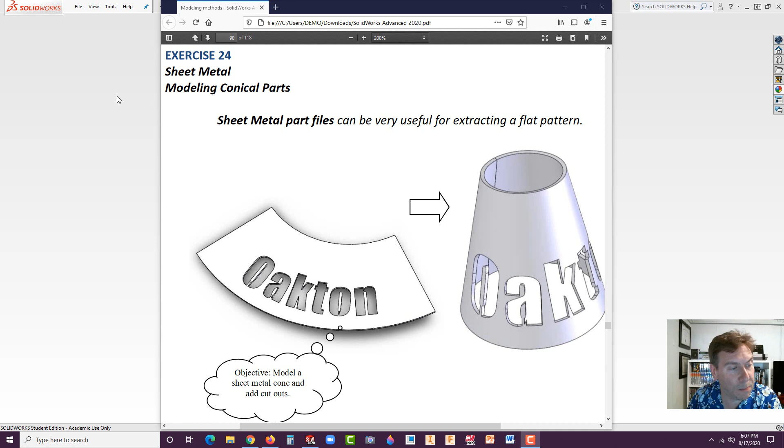We're going to take a rectangle and have it go to a smaller circle or a radius. But you would just replace the rectangle with another circle or a radius in order to create this. But let's go ahead and take a look at this, because not many people that I've come across actually remember this method, because it was done in the 90s and it's still inside SolidWorks.

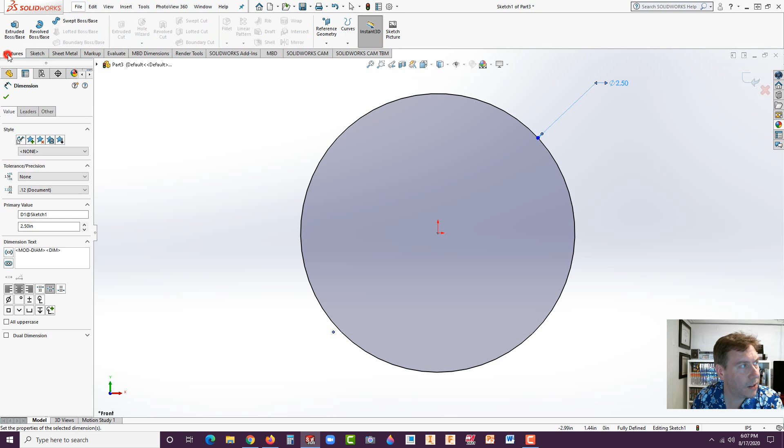Okay, so go to File, New, Part, and hit OK. Select the front plane and start a sketch. Take the circle tool and draw out a circle. And let's go ahead and dimension it at 2.5 inches diameter. Let's go to Features and Extrude Boss. And what we're looking to do is extrude it 2.5 inches at 13 degrees of draft. So put in 2.5 and then turn on draft and 13 degrees.

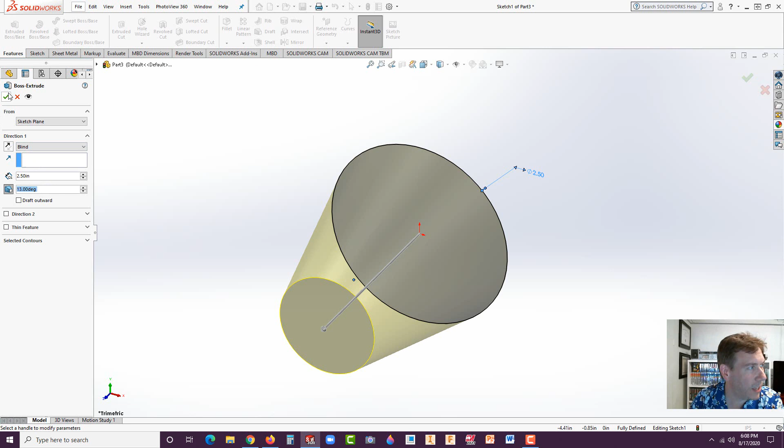Now, another application where if you have an angle and you want to make something like this shape really quick, that's why you might use this. Again, you might not really want to use it too often these days because there's much better ways with the loft. But let's take a look here. Okay, so I hit OK. Now go to the shell command and set your wall thickness. We'll go with 0.06. Select the front and back faces to remove for the shell and hit the green check.

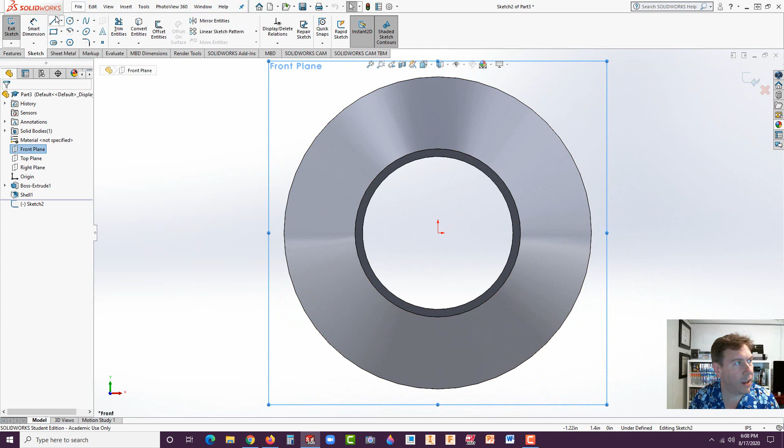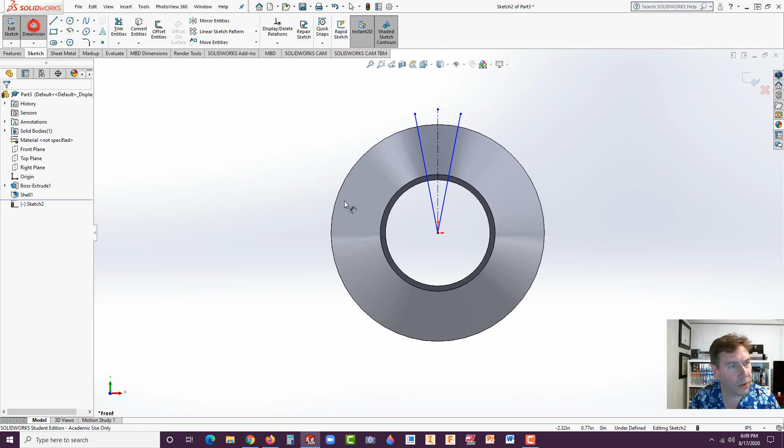All right, now we could go ahead and select the front plane, start a sketch, and let's go normal to the front there. Okay, and then I'm going to draw a center line from the origin straight up, and then hit escape, go to the line tool, and draw a line in like that. Now, with those two selected, go ahead and mirror those across. And let's go to the dimension and add a distance here at the top of 0.01. And let's control select that edge to this edge and make it coincident.

All right, notice I didn't close it. And also notice I didn't use a rectangular cut. That's one of the tricks. If you actually just had a straight rectangle, last I tested it, it fails to actually unfold it. So just be aware, that's why you have to put the angles in.

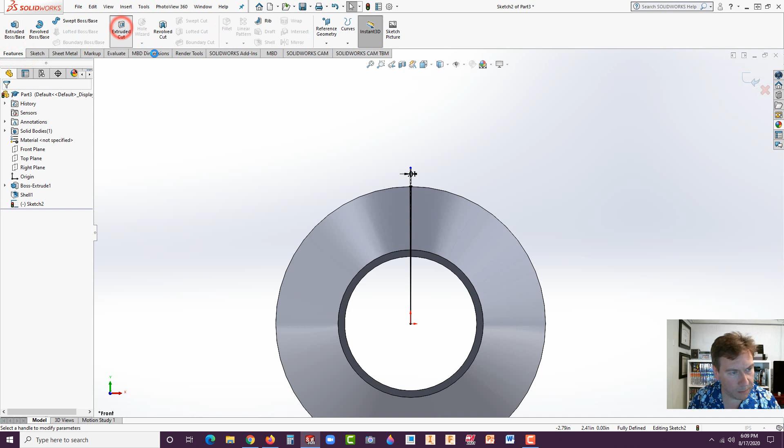Okay, so we go to Features, Extrude Cut, and it's usually pretty good. In this case, it's actually showing this little arrow. If I zoom up, it's going to cut everything on the outside and leave a little sliver. We want to flip the side to cut, so check the flip side to cut, and make sure it's set to through all. Hit the green check, and it should slice right through it and give you something like that.

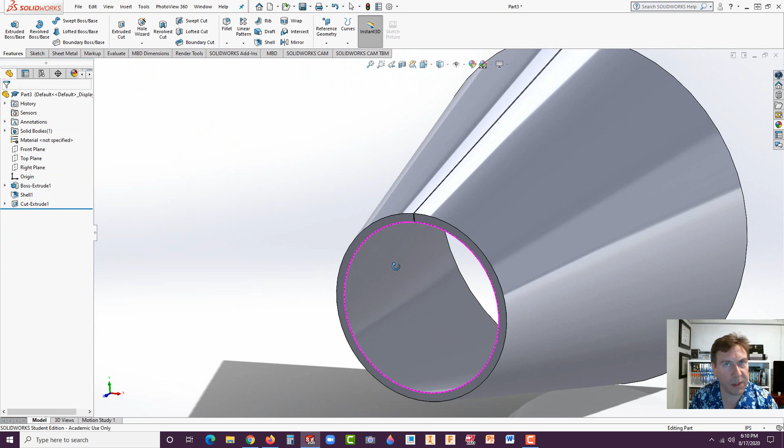Okay, now I'm going to go to the sheet metal tools. Notice I didn't use any sheet metal tools up until this point. We're going to use the old insert bends. And just a little history, the insert bends came out in 1997. That's when I started with SolidWorks with a value-added reseller, and I was a trainer. And this is all we had back in those days to make a cone that would work. And actually, I don't even remember knowing this technique until maybe around 98. So maybe a year later.

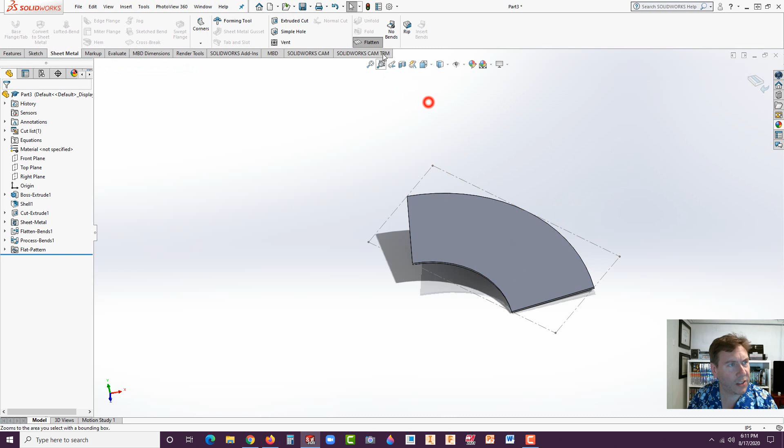But anyhow, for the fixed face, select one of these edges here, and hit the green check mark. And now you should be able to flatten it. Okay. Now, I know I have some lettering on the outside. As of lately, for some reason, the geometry hasn't liked the lettering too much, but let's try it. Let's actually fold it back up and use the unfold tool. And select one of those edges, collect all bends, hit the green check.

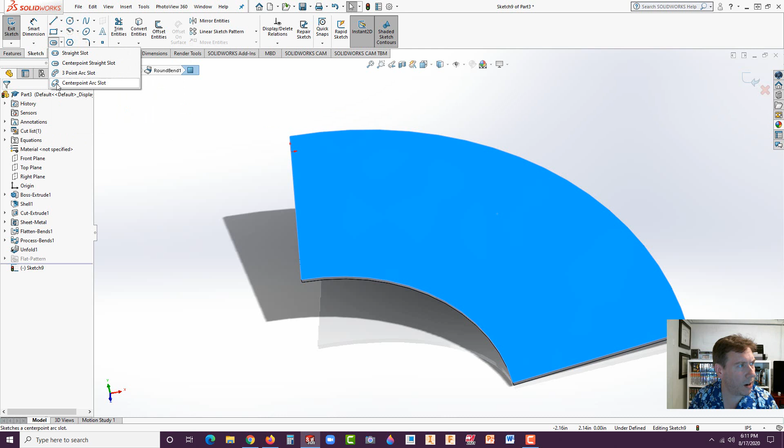Now we could select that face, start our sketch. Lettering doesn't seem to work too well, so let's try one of these center point arc slots. And let's go to features, extrude cut, link to thickness. And now let's go back to sheet metal tools, fold, collect all bends, hit the green check. And as I feared, it failed.

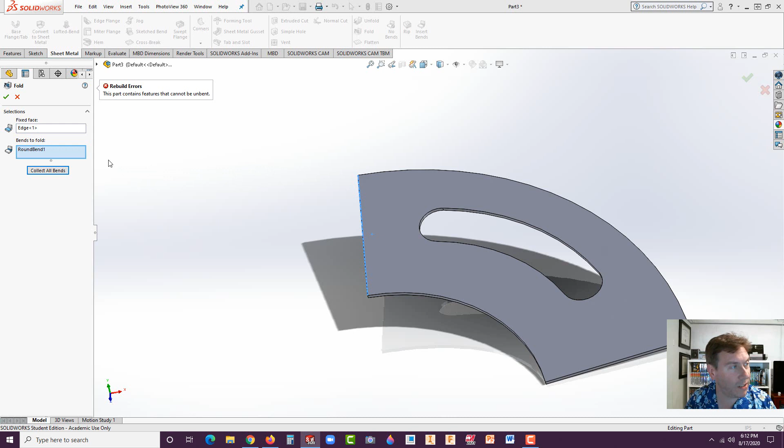So sometimes in the past it used to work, and for some weird reason I have gotten it to work. It might be the radiuses that are a little too complex. So you don't have to put this cut in there. I'm actually going to edit that sketch really quick and see if I can fix it. I'm just going to put a box in there. Let's just see if we can get something like a box. And now let's try fold. Okay. It doesn't like it, but for some weird reason, sometimes I do get it to work. Still not sure what the little trick is there. It used to work really well all the time.

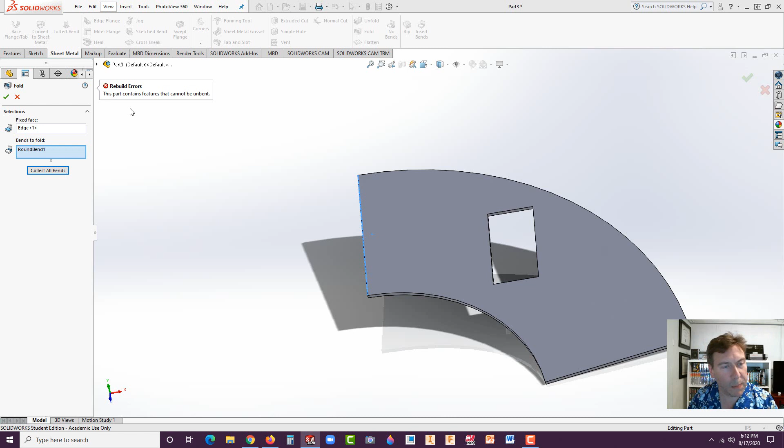But if someone does figure out how to get that to work, it might be just a matter of changing the thickness or something as easy as that. Like if I go to shell here, maybe if I change it to 0.03. Now we'll try it one more time, but you don't have to watch the rest of this if you're not interested in it, because you don't necessarily need to do this. It was just more for fun. It still doesn't work. Okay, so anyhow, that is the trick there.

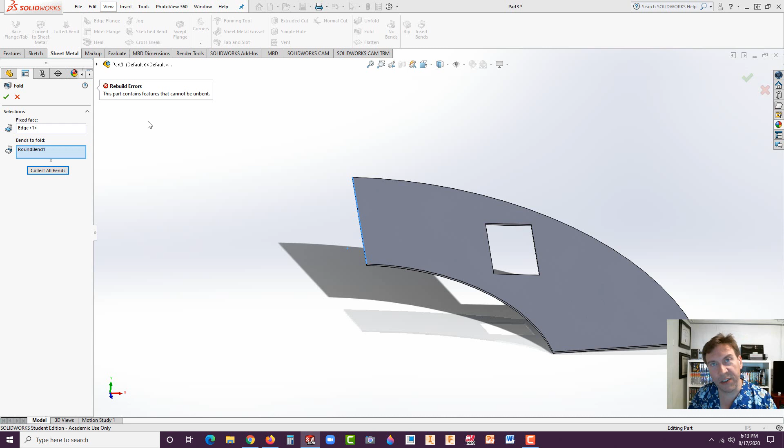Now be sure to watch the next video, exercise 25, which shows you how to make a loft. And you would be able to make a sheet metal cylinder with much more information than what you're seeing here. Again, this is just giving you a flat pattern. It's not giving you any details on how to partition it so it could be folded into segments like facets and such, which is what the loft gives you. So that concludes this exercise.